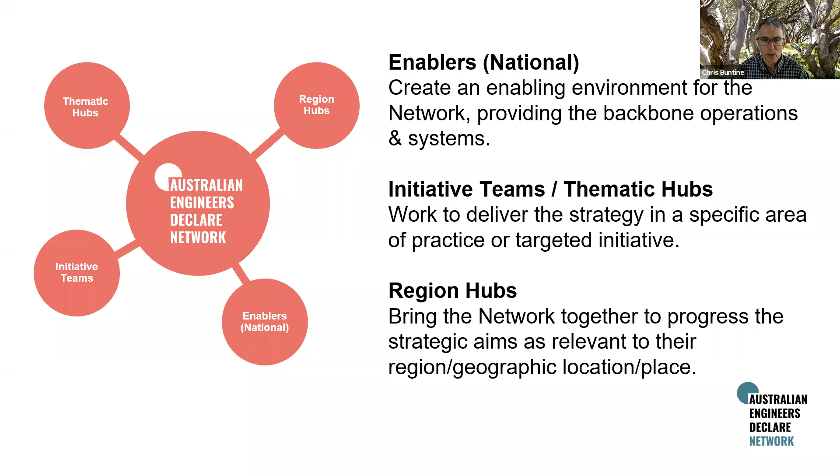Just lastly, a quick inspirational message. Rick Hoyt was a quadriplegic with cerebral palsy, and he convinced his father to push him, and they would do marathons and endurance events together. Initially doctors said Rick couldn't do much in his life, but together with his father, they became amazing examples in the US of inspirational efforts and overcoming challenges. They completed over 1,100 endurance events and over 71 marathons, and completed the Boston Marathon over 32 times. There's a plaque now next to the Boston Marathon that reads, 'Yes, you can.'

I think of what we're trying to do in the engineering profession in a similar way, in that we're in it for the long haul. This is not going to be easy - we're running a marathon, this decade and the following decade. So let's keep this message in mind: yes, you can. That's certainly what we can do in the engineering profession. And that's it from me.

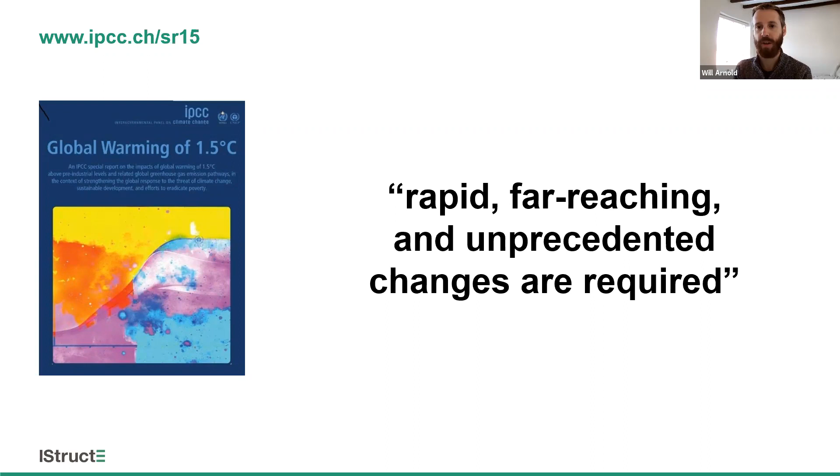All right, we'll start with a recap of what's happening to the world before we move on to some things to do about it. So this is going to get pretty dark and nasty before we see the light at the end of the tunnel. This is a report that was written in 2018, and it talks about what we think is likely to happen to this planet if global warming exceeds 1.5 degrees Celsius, or if it's capped at 1.5 degrees Celsius. The report highlights that if we are going to keep global warming within 1.5, we need rapid, far-reaching and unprecedented change. Those are big words, but words you've probably heard a lot over the last year. But this is something else. This is much bigger and scarier even than COVID, and you've even got politicians around the world starting to wake up and agree with this. So this is a big thing that we need to start dealing with.

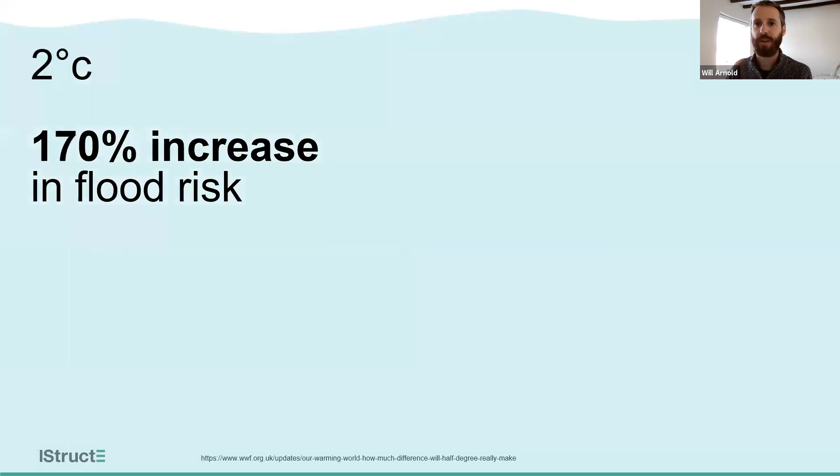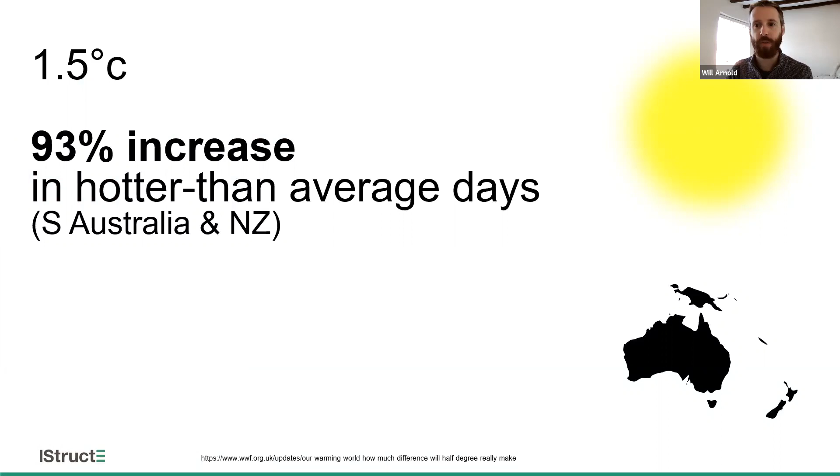In southern Australia, in New Zealand, at 1.5 degrees, the frequency of warmer days, which is hotter than average days, more or less doubles. Imagine those hottest days where you don't really want to go outside - you've got almost twice as many of them. But at 2 degrees, it's more than triple.

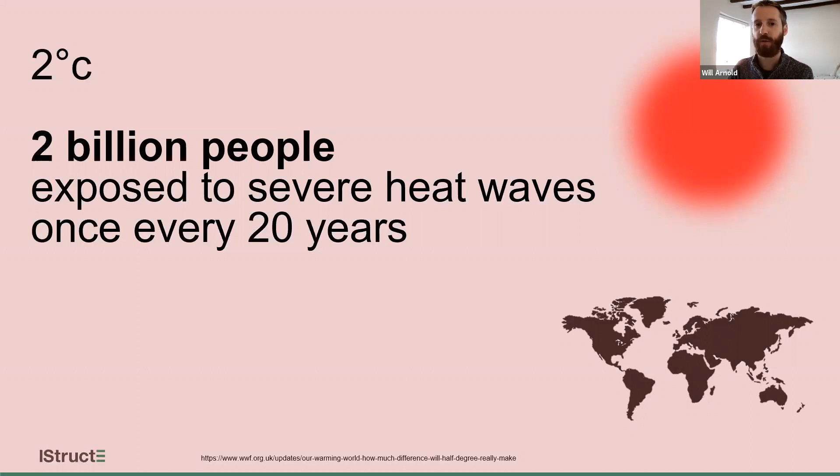Likewise, around the world, at 1.5 degrees, we have about 700 million people exposed to severe heat waves every 20 years. But at 2 degrees, that goes up to 2 billion. That's more than Australasia, North America, South America, and Europe put together - a huge amount of people. And that's every 20 years, so that's 3 or 4 times in your lifetime, the sort of heat wave that kills people.

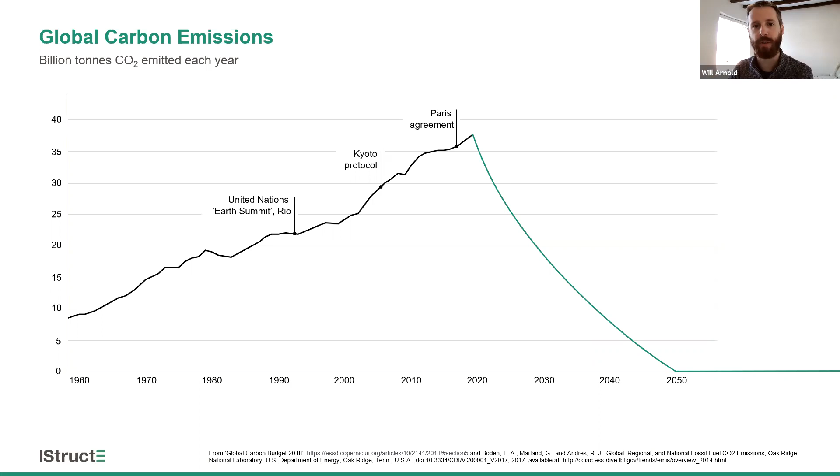So 1.5 degrees is pretty important. And if we don't manage to meet this curve, things are going to get pretty uncomfortable by the end of this century. Now we talk about the end of this century because that's the time frame used in most of these reports. They mostly run up to the year 2100. And I think a lot of people forget how close that really is.

Now I'm sure all of you can think of somebody like Bobby. I just want you to picture that person for a second, and imagine them on their 80th birthday, maybe blowing out candles, having a barbecue, whatever, surrounded by their family and friends. And I want you to think about the sort of world that we might have left to those people.

Every decision that you make on every project you work on matters. And from now on, you're making those decisions informed of the consequences, not ignorant of them. Those decisions are going to impact the lives of people you know and people that you love. So it really is time that we change what we do.

Right, the good news in this - because I did promise it was going to get dark before we came back out the other side, and this is the other side. So structural engineers, we actually can make quite a big difference in all this. Some of you might have seen these numbers before: globally, buildings and construction contribute nearly 40% of energy-related carbon emissions.

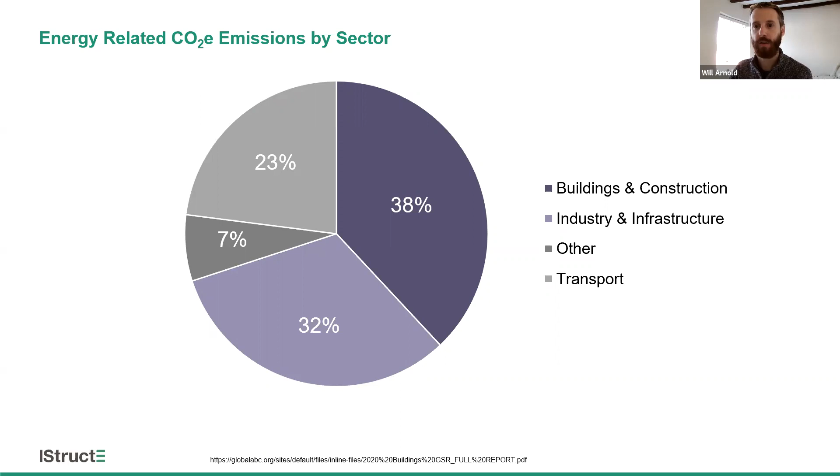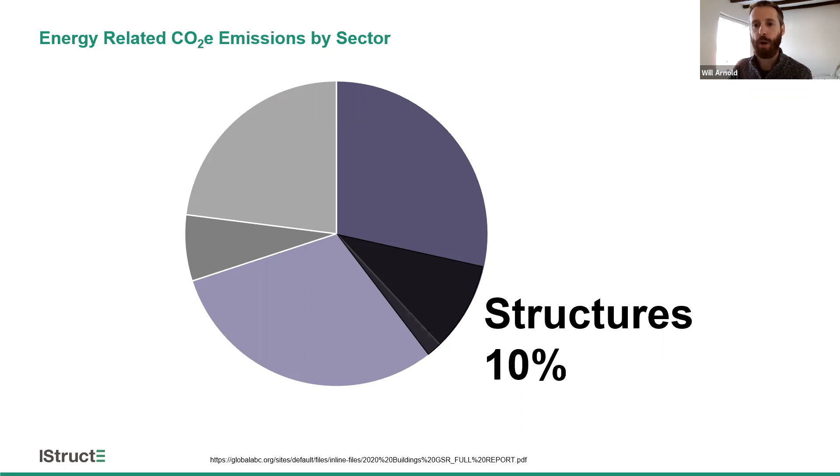And then the next biggest piece on this chart is industry and infrastructure. So as structural engineers, we sort of sit about here, and we make up about 10% of the total. So when we talked about 40 billion tons of carbon earlier, 4 billion of that is us. That's our chunk of the pie, and that's what we have to play with and reduce. 10%, surprisingly big actually. And then there's another 10% I want you to remember, because you shouldn't forget this one.

It's to do with this graph. So this scary graph that's dramatic and unprecedented, like a car slamming on the brakes - that line on the right-hand side is actually just 10% per year, which doesn't sound so hard, does it? So if you challenge yourself to do 10% better this year than last year, that sounds pretty achievable. And then we'll just repeat and repeat.

I think the Dick and Rick Hoyt example is a pretty good one of this being a marathon. But in a way, it's also a sprint, right? We've got to start this now. The longer we wait, the higher that percentage is going to get.

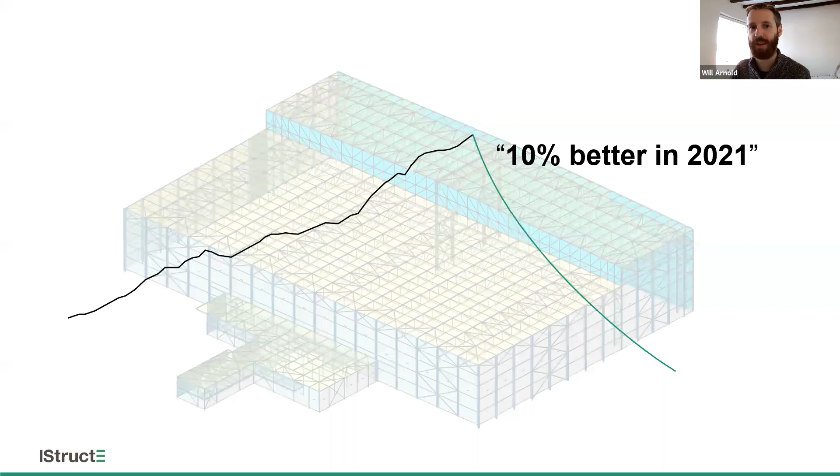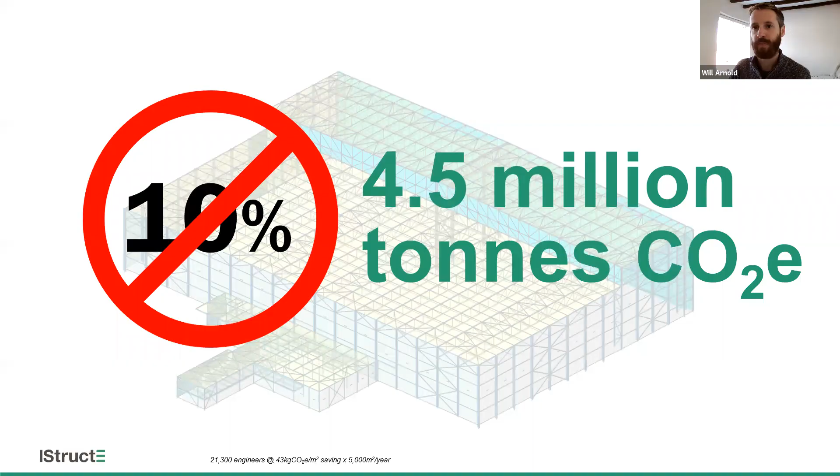So 10% per year, what does that mean? Well, I think a quick bit of Googling tells me there's about 20,000 civil and structural engineers in Australia. So if every one of those does 10% better this year than last year, that's about 4.5 million tons of carbon. That's pretty significant, right? That's the equivalent of turning the power off in Brisbane for the entire year - lights, electricity, aircon, everything off for a year.

So this is a big piece of the pie, our 10%. This is the sort of significant change. And if you turn the power off as a way of saving the world, people might sit up and notice. But this is a collective impact, and we shouldn't forget that. Any one of us is not going to manage to do this alone, but we need to add up our contributions. And even if you focus all your work on small projects, arty things, residential stuff - this all still counts and adds up.

The COVID thing is a pretty representative example of what happens when you need everyone to get behind something, but we really do need that here. So regardless of what line of work you're in, you are counting towards this kind of saving.

Right, okay, last bit for me before I hand over. So what can we do about it? We've recapped why this is scary, we've looked at how significant our contribution is, but we need the last piece of the puzzle: how are we going to start reducing things?

Some more good news: this website is full of free stuff. About 99% of it's free to our members, and over half is free to non-members as well. So even if you're not a member of the IStructE, do go and have a look. There's papers on carbon, on lean design, on understanding your responsibility, and viewpoints on influencing clients, all this kind of stuff.

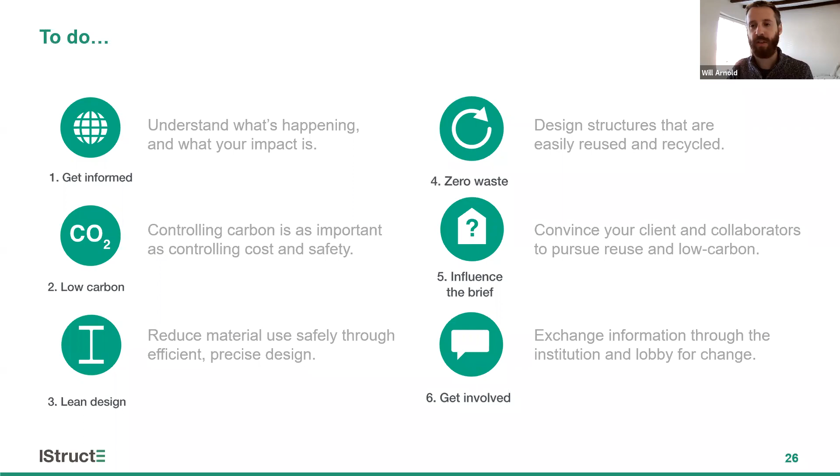If you go onto this website afterwards, you'll see it's full of articles listed like this. These are just 3 examples I grabbed earlier, but there's all this kind of stuff - 2-3 page articles, written in plain English. You can pass them on to architects, to clients, to your mum, whoever you want really.

The 10% thing I talked about, needing to do 10% better this year than last year, it's worth trying to understand what that means in terms of your work and how you might achieve that.

Some of you might follow me on LinkedIn - if you do, you'll notice I had a bit of a dig at Bill Gates last week because he's released this new book, which is very good and interesting, and gives you quite a nice overview of what's happening around the world. But it's all about technical innovation, new materials, the future of concrete and steel and all this kind of stuff.

But frankly, that's not going to help you save 10% in 2021. All of that stuff is needed, and we're going to need it to come around pretty soon if we're going to keep doing 10% per year. But for this year, we simply need to use 10% less material.

So you don't even have to start going out and speccing different things or speaking to different material manufacturers just yet if you don't want to. You just have to work a bit harder on the design to get your usage of concrete and steel down by 10%. These triangles on the screen are about a hierarchy of impact - do the stuff at the top first, then work your way through it.

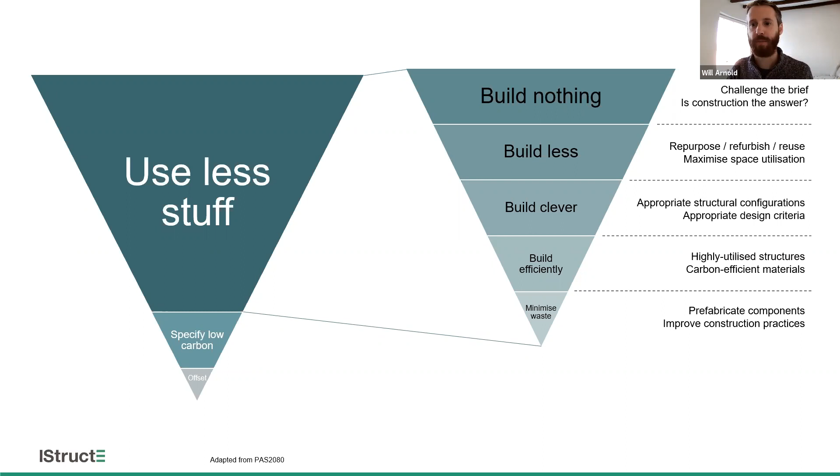If you look at things like the UN SDGs, it helps you understand how much overlap there really is in all of this. But whilst you can't forget the bigger picture, you must also remember that the embodied carbon and whole life carbon of a building - that's where your biggest role is amongst all of this as a structural engineer. In your day-to-day life you might save 10, 15 tons of carbon a year, but in your professional life you can save 1,000 tons of carbon a year if you're trying. There's this massive difference between the two, and that's why it's worth keeping that focus right at the center of your mind.

This is why, amongst all those other bits of guidance I've mentioned, the institution has put a big effort into carbon-based content. Last summer we released this guide on the left, how to calculate embodied carbon, which is applicable anywhere in the world. It's got UK carbon figures in it, but it also has global averages, and there's no reason why you can't use it with Australian carbon figures if that's what you've got hold of and you're doing projects in Australia.

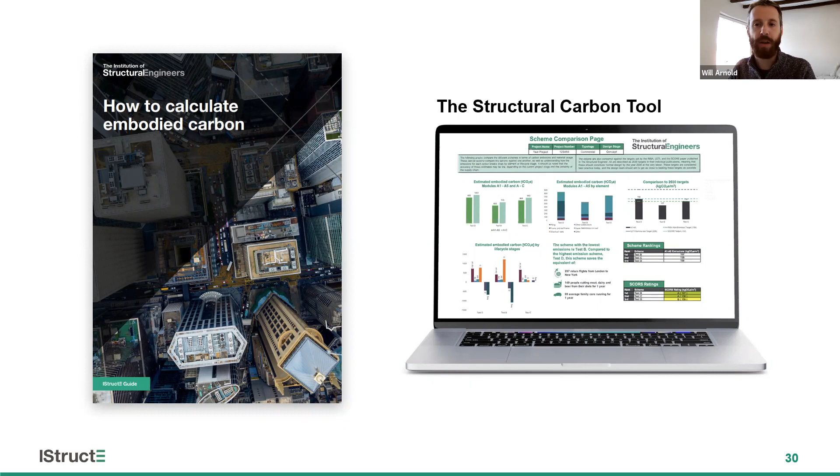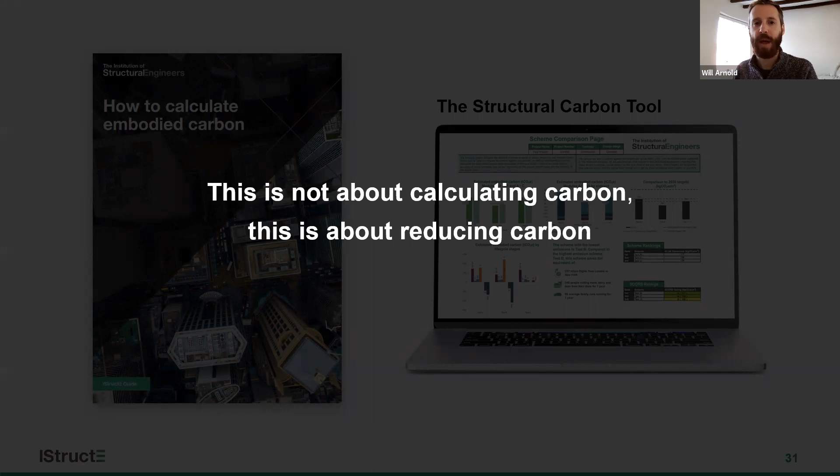We also last month released a carbon tool, which is basically just an Excel spreadsheet version of the same thing. But it's worth remembering, both of these things aren't about calculating carbon, they're about reducing it. This is about helping you identify where the carbon is so that you can then make good decisions with your materials so you can reduce it.

I couldn't talk to you this evening without doing a 3-minute intro to the tool. I'll put up a web link at the end of this so you can go and download it after we're done talking. I should just show you what's in it, because you can use it anywhere in the world - it's worth having a go at if you haven't done already.

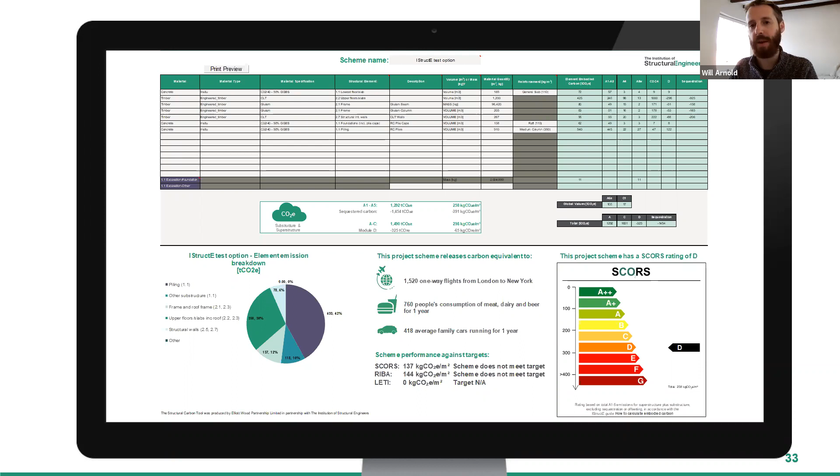So this is what it looks like - it's an Excel spreadsheet. It's got some tables for putting material quantities in, and then it gives you some data out the other end: how much carbon's in this part, how much carbon's in that part.

So A1 to 3 is about turning raw materials into a product, whether that's a steel beam or a timber I-joist, whatever it is, turning it into a product in a factory. A4 and 5 is then turning that into a building or structure - A4 is transporting it to site and A5 is building with it.

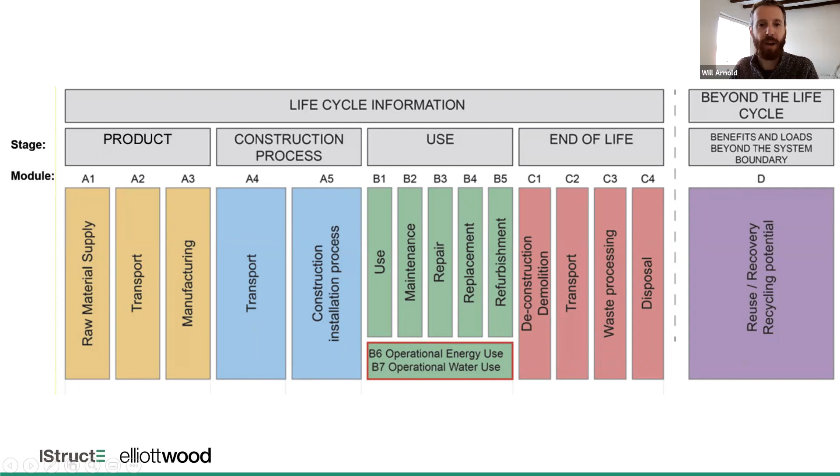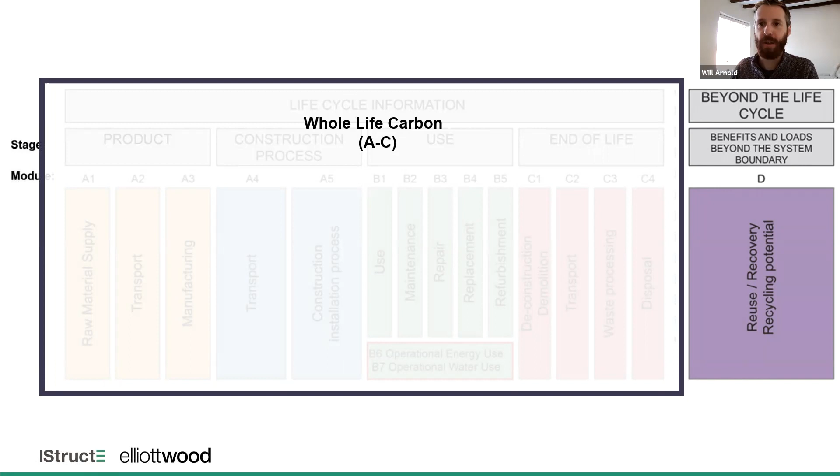When we talk about carbon, I've got to explain this because I'm about to show you some outputs and they wouldn't make sense otherwise. We talk about whole life carbon - that's from raw material right up to demolishing and getting rid of the building or asset at the end of its life. And we talk about upfront carbon.

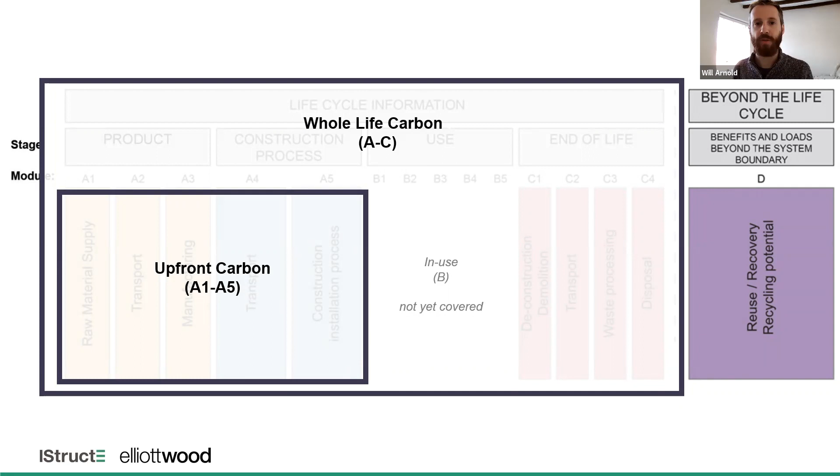So it's the upfront emissions, the stuff you're pumping out into the atmosphere today, that's really important in all of this. You should always think about things like module D too, but bear in mind how this is worded is quite important - so potential future benefits, although this is your recycling and possible circular economy benefits, it's all a bit guesswork in the future.

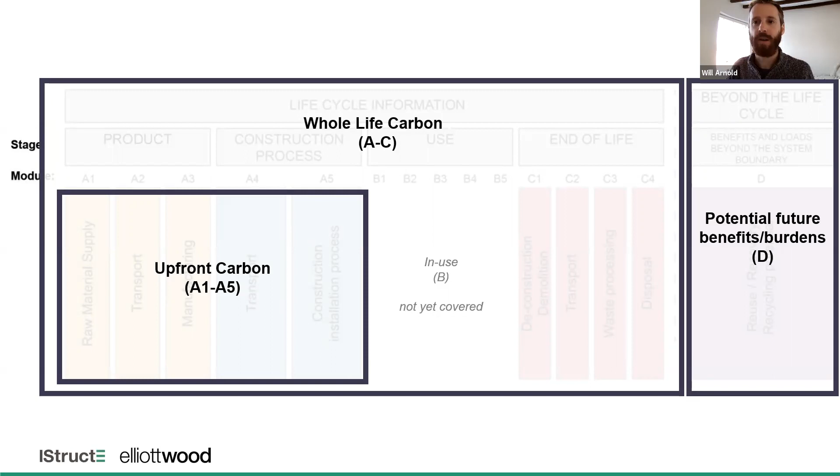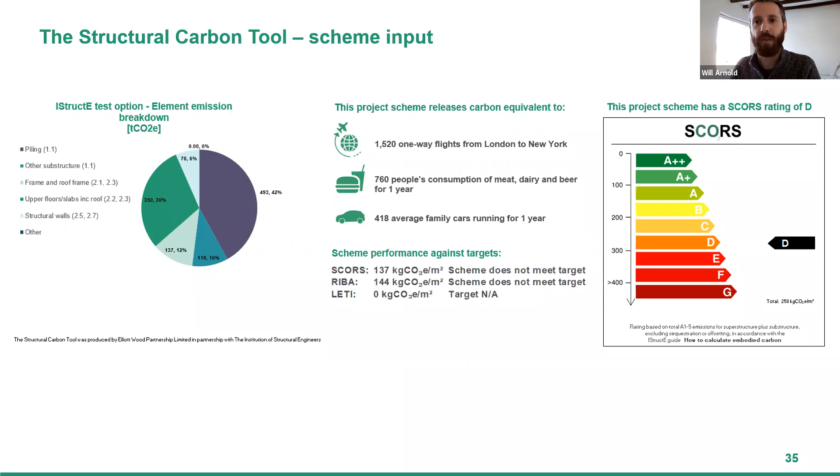There's a pie chart on the left - in this case we can see that most of the carbon's actually in the substructure or the piling, so you might start thinking about getting more ground investigation work done to decrease the size of those. That lets you have targeted conversations with your architects rather than just trying to push everything as low as you can. Stuff in the middle compares it in terms of flights and meat and dairy and stuff like that. And this thing on the right is a rating sticker we've come up with - it takes your kilos of carbon per square meter and puts it on a sticker so your client starts asking for it to be green instead of red.

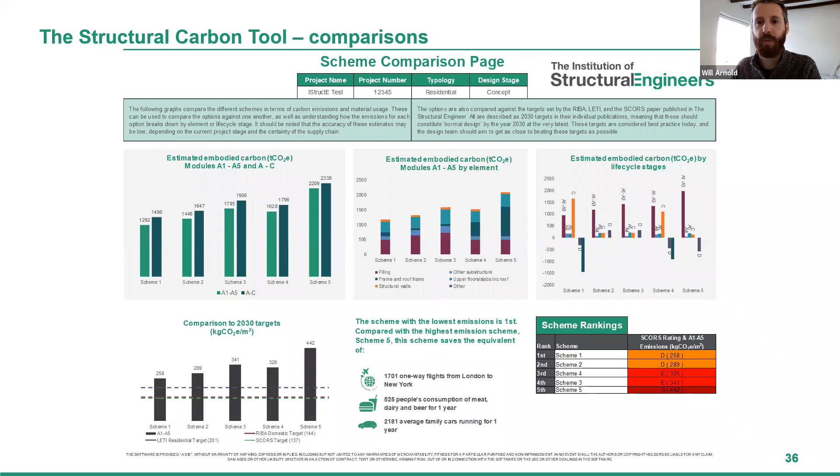There's some comparison pages where you can view one against the other - you can go have a look at those in more depth. And last but not least, the carbon figures in here to start with are global averages. If you've got EPD data or local average data, you can add them into this chart yourself and it'll let you import them into the main spreadsheet. So if you know you're using a certain type of steel on your project, you can put in a carbon factor for that steel here, and that drags it across.

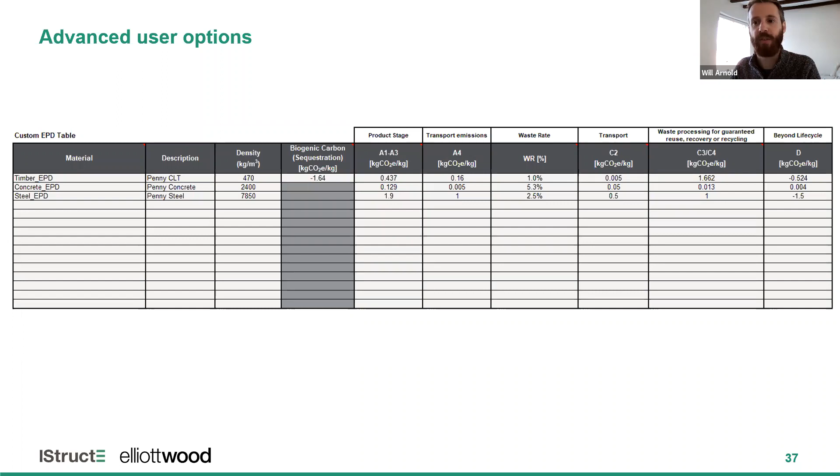Right, Ricky, Lucky, OT, I don't know which one of you is going to share a screen, but go for it. Thanks, Will.

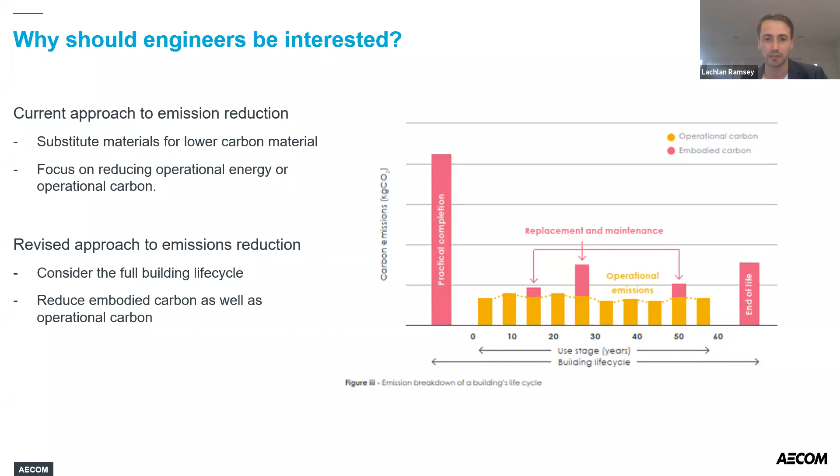So in regards to when you should speak to your client, the answer is day one—talk to them straight away. I think it's when you're talking about what materials you're going to build your building out of, and the cost and constructability questions are being answered. That's the time you should be having that discussion.

This doesn't necessarily mean you've got to go for a timber structure—this can be optimizing the amount of concrete to reinforcing you're using to actually reduce that overall carbon. And on a note about our clients, definitely our more environmentally conscious clients are starting to ask about this stuff.

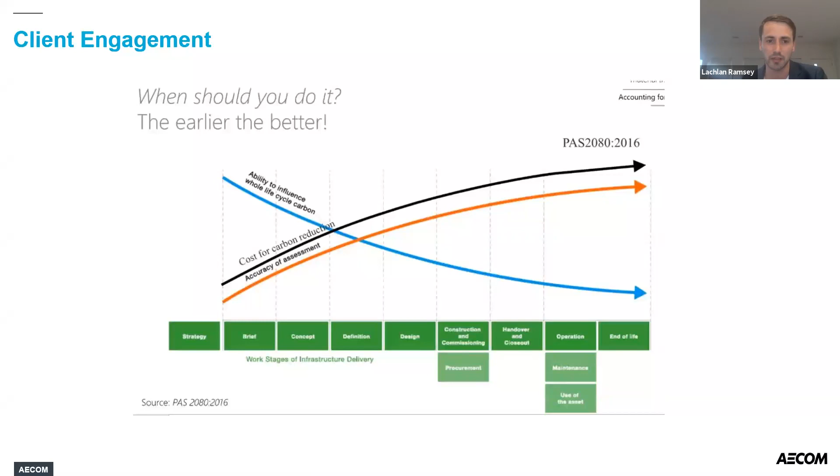We've certainly been asked about it from Lendlease, our government clients, Development Victoria, and a lot of architects as well. Just talking to my friends who are architects, in all parts of the market, people are really interested in embodied carbon and where this is going.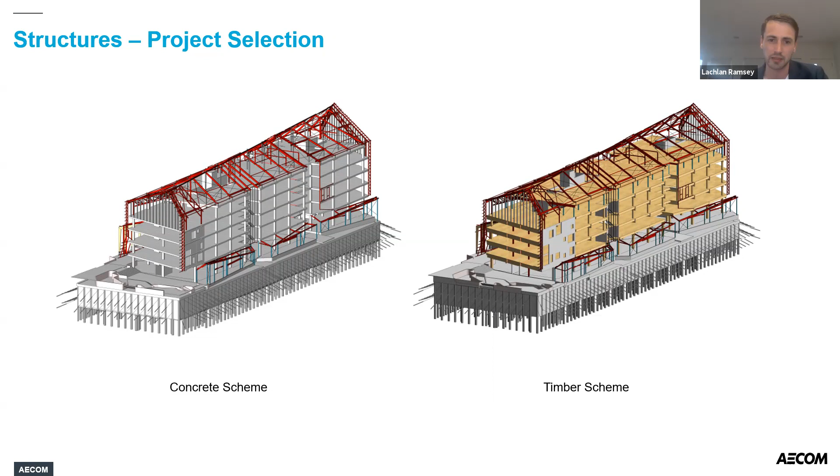I'm going to touch on our case study that we worked on last year. This is about a $100 million office building, built in a regional centre just outside of Melbourne. It was quite unique because we actually produced two sets of tender documents: a conventional post-tension floor plate scheme, and one where the floor plates were CLT timber with glue laminated beams.

Part of that study, we also looked at the transport emissions and did a bit of a sensitivity study to understand how they affect things, and Will went through it in his presentation. The Eurocode defines A1 to A3 as from when you mine those materials out of the ground through to when you've got your concrete in your truck ready to go to site. The A4 category is taking it from the factory to your site.

For this project, we looked at a few different options: structural steel sourced in Australia or sourced overseas in China, though structural steel is a small component of this job. Then timber sourced in Australia and timber sourced internationally in Italy. The reason we went with Italy is because this building did end up being built out of CLT, sourced from XLam Dolomiti in Italy. So it's actually quite relevant to this project.

You can see there that it doesn't make up a huge component of the overall embodied emissions, but if you actually look at that 350 tonnes difference between sourced in Australia and sourced in Italy, that equates to about half a year.

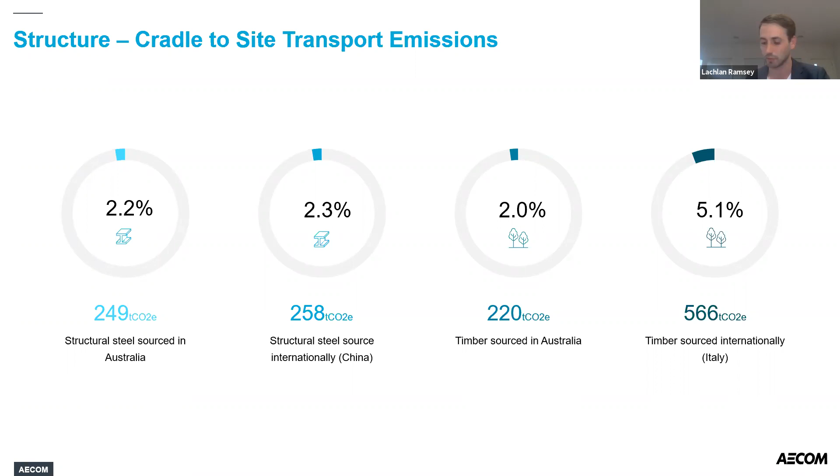This final slide is about the two schemes. The concrete and the timber scheme look fairly similar off the bat, so that's the two on the left-hand side here.

Our initial assumption was that the timber was just going to be miles better than the concrete, but there's actually a reasonable amount of embodied carbon tied up in engineered timber products. There's a lot of cutting down, maintaining the trees, cutting them down, milling, sawing, transporting, and in engineered timber products you've got a gluing and lamination process as well. It's also important to note that in that timber scheme, it's also including the concrete retention and the substructure, so there's still a lot of concrete included in that.

But the big thing about timber, and the reason people are going for the timber as an option to reduce carbon, is the story about biogenic carbon and the sequestration of carbon as the tree is growing and sucks in the carbon. The theory is that for the period the building is standing there, that's carbon that is not in the atmosphere, and new trees get planted in its place in the forestry.

So when you start including that biogenic carbon element, for the right-hand side of the graph there, it probably equates to about a 30% reduction on this project, which is about 5 years of operating emissions. So it's a really significant saving, and certainly a pretty interesting process.

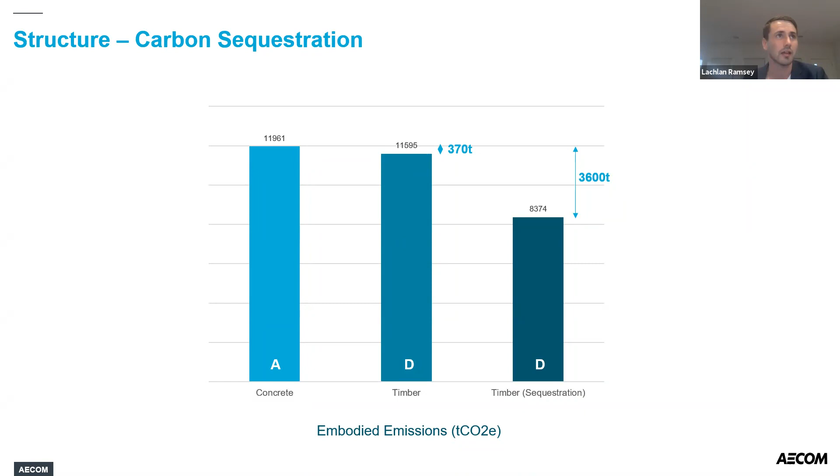So I'm going to throw over to Ricky now and let him tell you a little bit about some of the resources available to structural engineers in Australia.

Thanks, Lachie. So the first thing I'm going to talk about is the resources we have available in Australia for calculating embodied carbon. I guess the main aim we're trying to achieve is to accurately calculate the embodied carbon in the structures we're designing. Sounds simple, but we're typically used to having a suite of tools at our disposal, formulas, software, examples of previous buildings.

When it comes to embodied carbon, there are a growing number of tools on the market. Will talked about the IStructE tool, and in Australia there's more and more things coming online. Some are more complicated, some less complicated. Some are free, some are licensed.

So the calculation we're trying to do is pretty simple. Just multiply the quantity of materials you've got by a coefficient, and you get the tons of CO2 released, and then you can compare your different schemes. We all know how to calculate quantities, and basically the difficulty is having a coefficient that you can rely on. So the list on this slide is basically in order of complexity.

As you go down the list, it reflects what stage of a project you'd be at, using more complex tools. So the EPIC database is one we've been using. It comes out of Melbourne University. It's government funded, quite a comprehensive database specifically for construction materials. It's aggregated Australia-wide, so you can just pick it up and use it anywhere in Australia, and you've got a pretty good starting point.

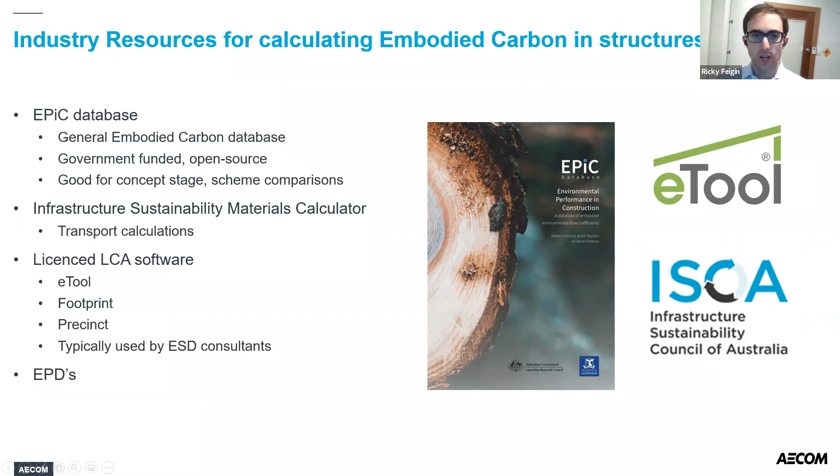And then once you get further down the line and you're heading towards construction, you start looking at environmental product declarations. Like EPIC, EPDs cover A1 to A3 emissions.

They're produced by specific suppliers. And so once you're further along in your project, you can start thinking about the exact material, where it's going to come from. EPDs are standardized, so they're international standards covering how to put one together, and you can get an EPD for just about anything, like food, clothing. My understanding is they're most commonly used in the construction sector.

And as your scheme is developed and locked in, you can start comparing suppliers, like different concrete suppliers for the emissions from their different mixes, and get into a bit more detail. For steel, there's not a whole lot of competition in Australia, but our steel also isn't particularly efficient, as we typically use blast furnace steel making. That's more carbon intensive than electric arc furnace, which is used more extensively elsewhere in the world. So it could be that sourcing your steel internationally might not be as bad from a carbon perspective as you might think.

The additional transport emissions could be offset by more efficient steelmaking processes. But that's the sort of thing you need to start thinking about when you get to this stage of the project. Large timber like CLT panels and glue lam, as Lachie touched on, you might end up specifying it thinking it's going to come from Australia, and then end up getting it from overseas, partially negating the benefits because of the transport.

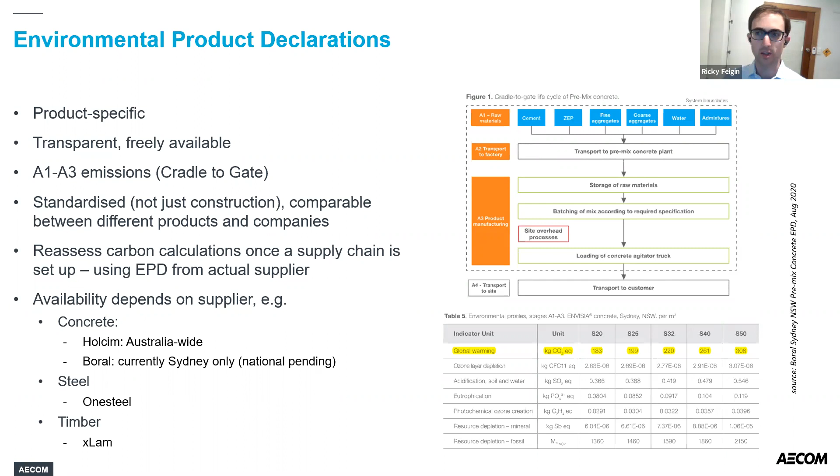So moving on, I'm going to talk about Green Star a little bit. Green Star's one of a number of sustainability rating systems for buildings globally. Their tagline is Australia's largest voluntary and truly holistic sustainability rating system for buildings. It's basically a point system whereby you satisfy certain minimum provisions and you get enough points, then you get a rating. It's not just about embodied carbon or even environmental issues - it covers the whole building, how it affects the people around it, society, the environment.

Practically, from a structural engineering perspective, our influence is generally on what we've been talking about, as in the material usage - and not just minimizing materials or picking the lowest carbon materials. It also makes you think about responsible material production across the whole supply chain, so a whole kind of life cycle analysis of your materials. Things like the waste management practices of the mine which supplied the nickel for your steel alloy might come into it, or the water usage of your concrete batching plant.

There are points available just for choosing products from a manufacturer which can provide you with a life cycle analysis. I think the thinking is, by the time a supplier has gone to the effort of following the whole supply chain and publishing their findings, you can probably assume the supply chain is at least somewhat responsible.

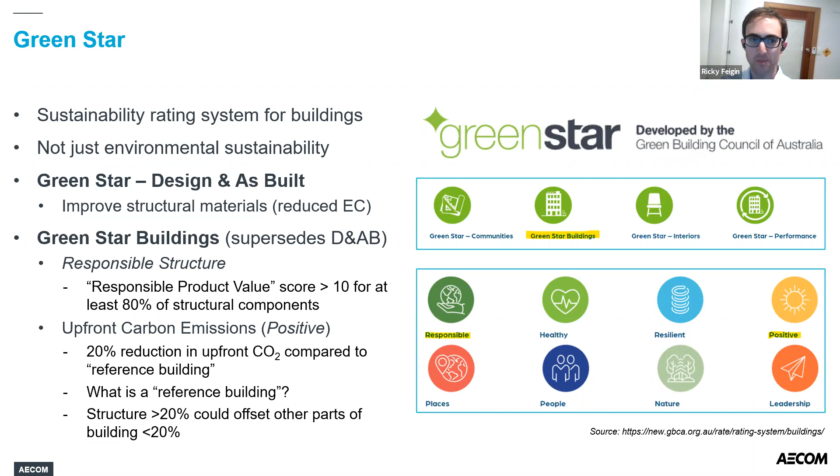So finally, I'm just going to mention our local carbon reduction targets. You might already know that our federal government has kind of been dancing around a net zero target for a little while. By the time they announce it, it's inevitable, it's going that way across the world. By the time they do announce it, it'll probably be somewhat symbolic from a practical perspective, as all of our states and territories already have net zero targets.

What we do seem to have from the federal government is agreement on meeting our Paris commitments by actually reducing our emissions, rather than using the somewhat controversial Kyoto carryover credits that were being thrown around. That would have seen reductions being claimed without actually reducing emissions year on year, so wouldn't have really helped.

Even without carryover credits, our target of 26 to 28% reduction on 2005 emissions by 2030 isn't really particularly ambitious. The government's main climate change advisory body in 2015 recommended a target of somewhere in the realm of 45 to 65% below 2005 levels. But again, a lot of the states and territories have picked up on this with more ambitious 2030 targets than the federal government target.

And just to finish off, I'll point out that Tasmania doesn't actually have a 2030 target, but that's probably because it's actually already achieved net zero. In 2018, it emitted negative 2.2 megatons of CO2 equivalent, which is down 111% from 2005 emissions. So, obviously not every state is Tasmania, but it's a story that shows that we can achieve something. And yeah, that's me.

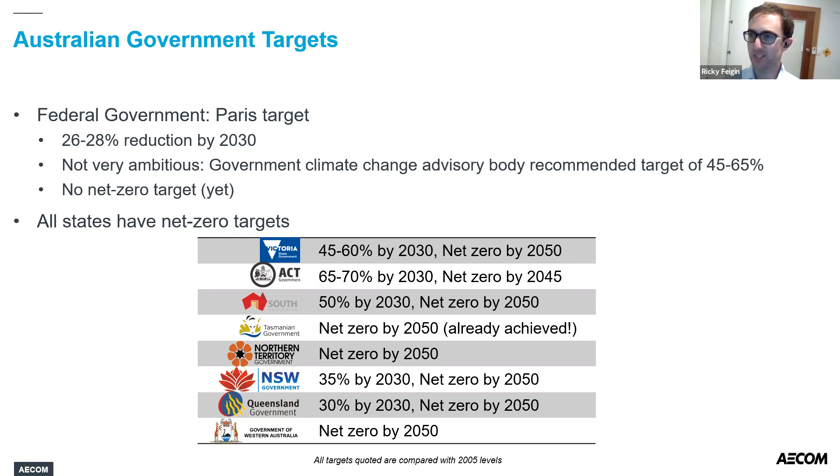So I think the first question is for Will, and it's from Farah. Is using 10% less material the only way to reduce emissions, or should we be combining with using more sustainable materials?

Yeah, okay, thanks, that's a good one. So when we say the triangle that I showed that talks about using less stuff and then specifying a low carbon material, what we're not saying is just fill everything in concrete anyway, but use less of it. What we're referring to when we talk about the specification of the material is don't go assuming you're going to end up with a low carbon version of a certain material before you've done everything else you can do. So most low carbon equivalents of materials are based on the use of some kind of limited resource, some kind of finite resource. So with concrete or with cement, it's cement replacements, which are in finite supply, and around most parts of the world, we already use as much as we have. With steel, it's the percentage of scrap that's available.

And again, we already use most of the scrap that's out there around the world. And even with timber, it comes from different manufacturers, you may not have got your supply chain locked in. So when you're doing your carbon calculations early on, you should assume that you're going to use the normal version of whichever material it is. That's not to say, of course, that you shouldn't compare different materials. What would be the difference if this was a timber scheme or a steel scheme or a concrete scheme? What would it be if I was doing a post-tension concrete scheme? I'm going to use less material, but might have a higher amount of cement in there to give me a higher strength. What would it be if I was building in some kind of other bonkers thing like earth or whatever? Yeah, absolutely think about materials as well as using less stuff, but you, as a rule of thumb, you're going to need to work on the basis that it's the normal version of that material, and you're probably going to need to use 10% less for it than you would have done last year, either way.